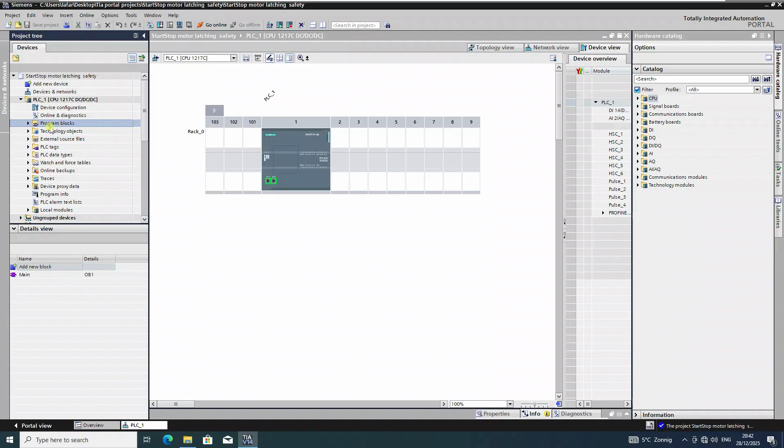To do this project, I have added a CPU 1200 into my project, and now I'm going to add an FB. The FB I'm going to call FB_MotorStartStop,

and the language we are going to choose is SCL language. First of all, we are going to declare the inputs and outputs.

Start push button, stop push button, emergency stop push button.

Now output. Okay, it's already written there. The output should be run CMD and fault,

and we also declare a static variable and a static latch. Okay, at this point, now we are going to write the code.

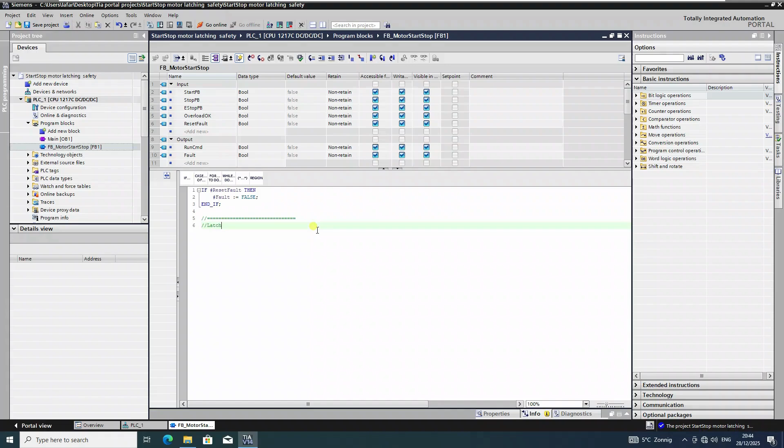If reset fault, then... for example, or seal in.

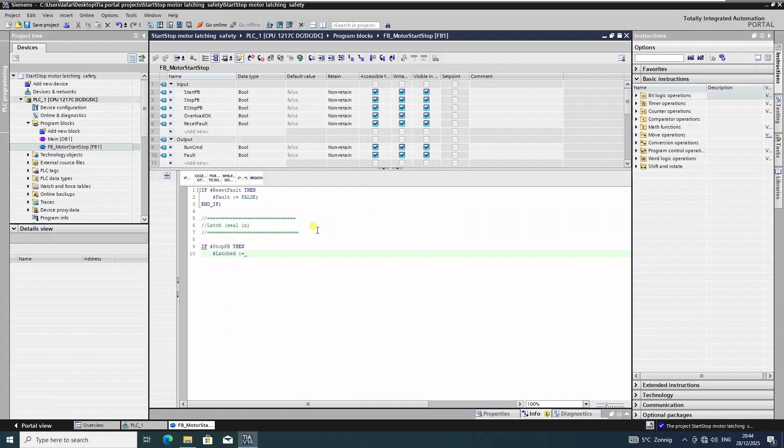If start push button and emergency stop and overload, and not fault, then it's equals to true.

And if run cmd and emergency stop and overload, okay, and not fault.

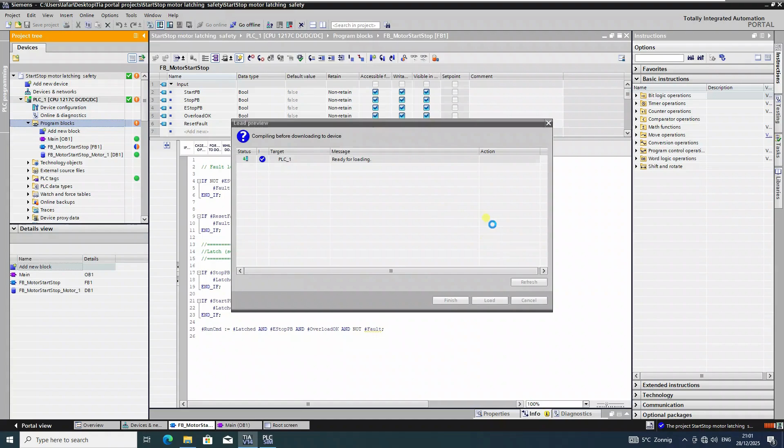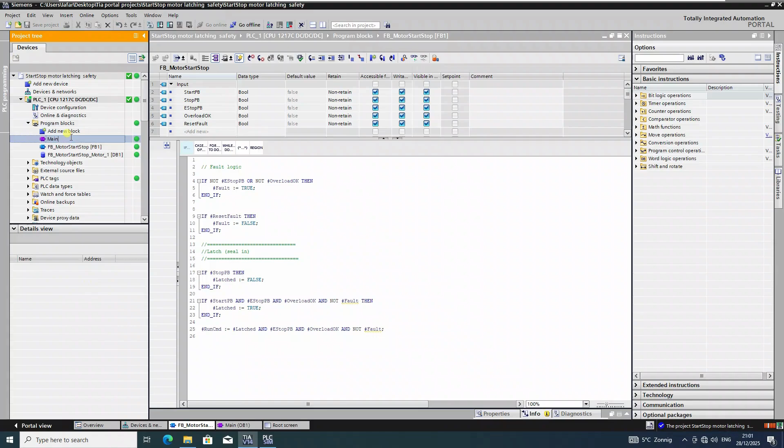Voila, this is our code, and... Control 1.

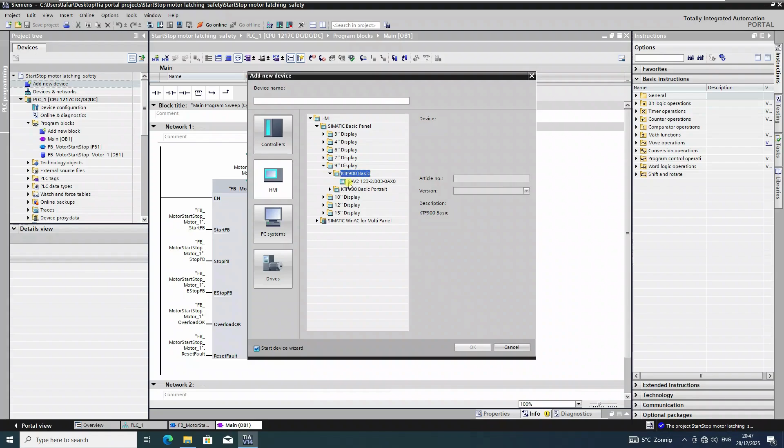And we are also going to add an HMI. First of all, we make the connection between the PLC and HMI.

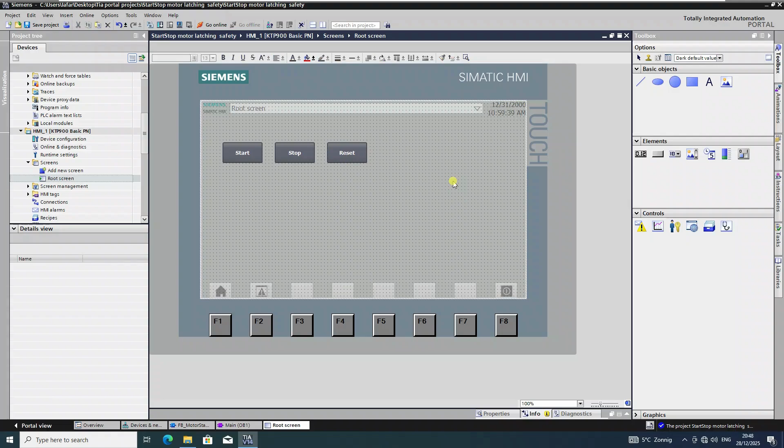Reset fault, and then let me see. Okay.

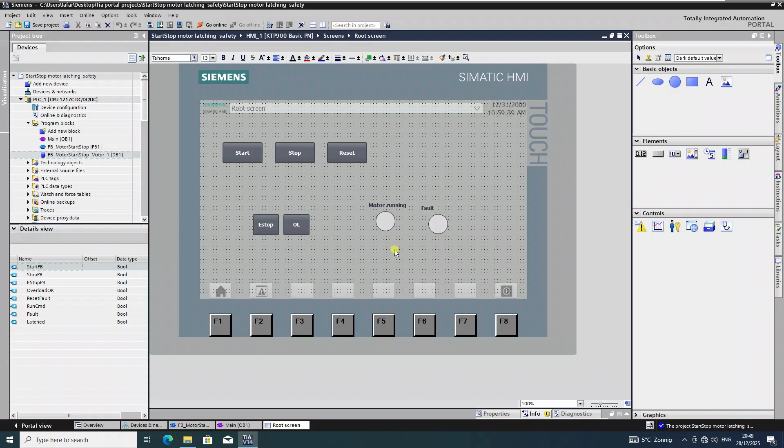OL is the overload. And now, all right.

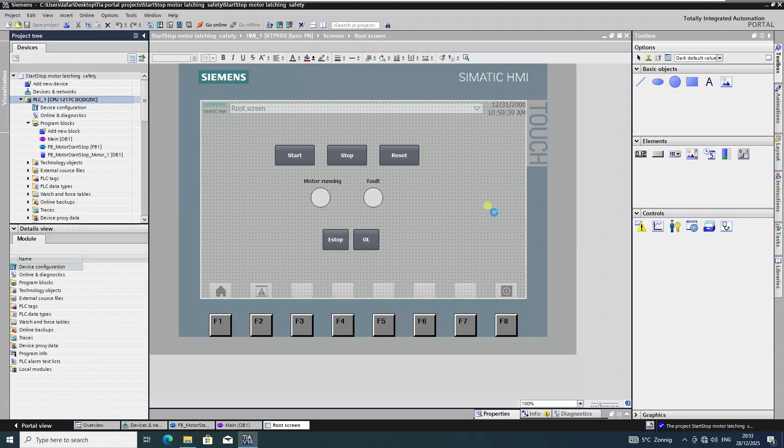Now we're... right now the fault is active because the e-stop is not true.

Reset. Okay. Now restart the motor. If one of them, the overload, will go deactivated, the motor is stopped, there is a fault. We activate, we stop the motor.